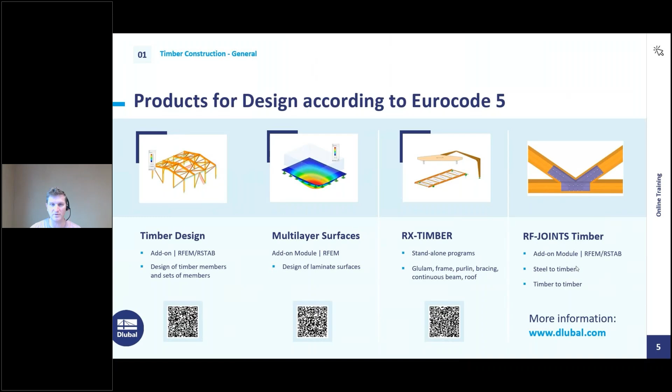We try to implement a new philosophy in RFEM 6, which is not available yet, but we are working on it. Okay, then we can switch over to RFEM 6 and start with our first example.

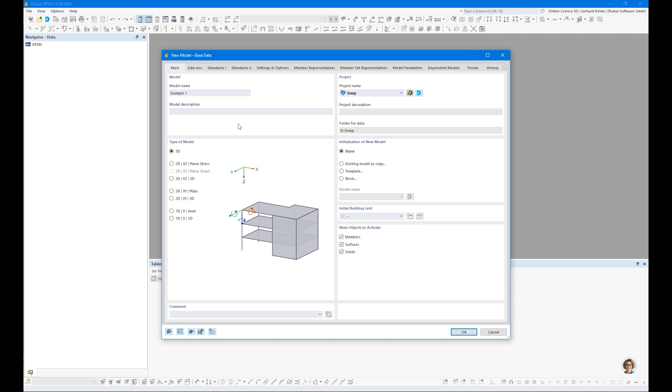Then we go to the add-on tab. Here we can activate the Timber Design add-on. Here on the bottom you will see the Multi-Layer Surfaces add-on, which was presented here.

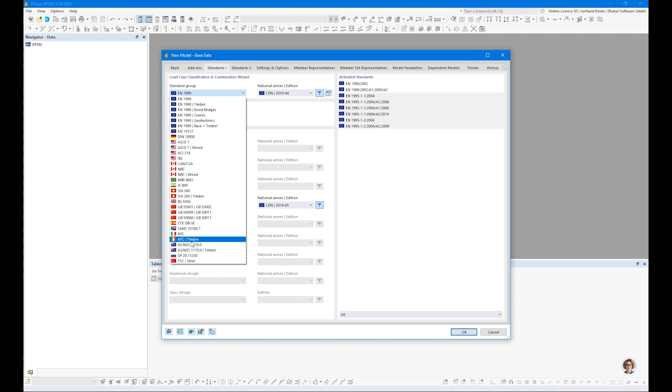We do not need any load wizard, so I deactivated this option here. For wind and snow loads, we don't want to generate it. Standard group should be changed to the timber-related standard group in this case, to consider the correct serviceability limit state load combinations. As you know, we talk about load duration classes, so that's why we need to always select the additional timber standard group, for European standards or US standard, Canadian standard, Italian standard, Australian standard, exactly. In this presentation, I will use the global Eurocode, that's why I do not select any national annex here.

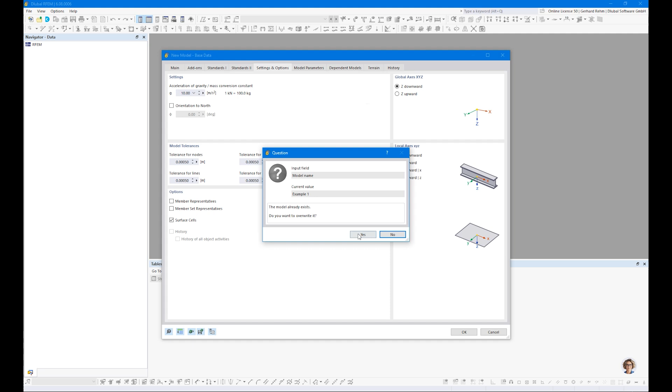So maybe we can deactivate the member representatives, because we model only a few members, that's why we do not need it. Okay, then let's start.

You know about all the navigators and the icons, I guess, from the RFEM 6 student training, that's why I will not mention any further things about that. We start creating a new member, I use this icon here on top.

And each member needs a cross-section. So I will create a new cross-section. So maybe before I start, I will delete all data to start exactly from scratch. So a new member, and we will load a new section from the library.

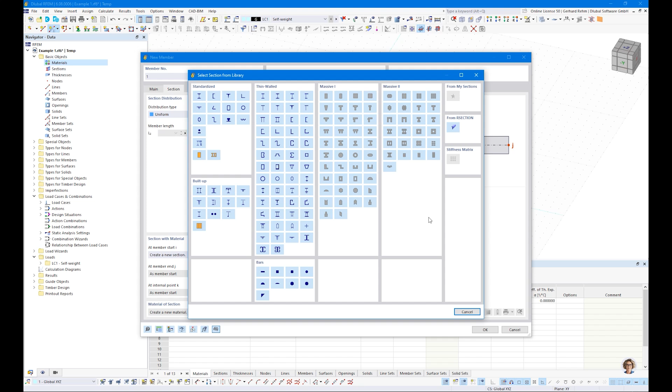So all these massive 1 sections can be designed according to Eurocode and also according to SIA and I guess the NTC. The composite sections, massive 2, is in progress, so it's not available yet in RFEM 6, since we introduce a new philosophy to design composite sections, because we do not want to use the gamma method, which is described in Eurocode 5, which is really limited in its usage, and we will use a different approach here, and we are working on it. So, but mostly we use our rectangular section.

We need a material. We open the material library, and we can use here these filters to find the correct material, or we can simply use the search. So in this case, I want to use the C24 according to European standard. That's why I enter C24 space EN, and I will get directly the material I'm looking for. Okay, then let's go to the geometry. In this case, the width is 120 millimeters and the height is 200 millimeters. If you're interested, you can also check here the section properties.

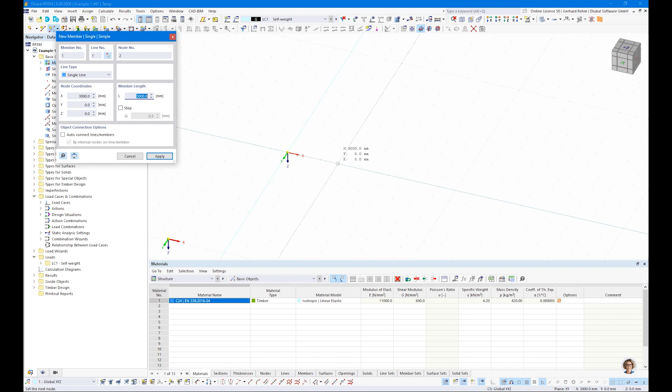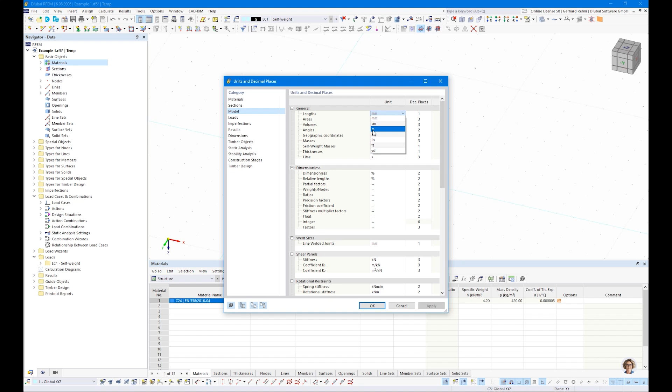Okay, so now the beam is on the cursor. We can start, for example, here in the origin and use these black grid points. I see the unit is still in millimeters. We can change this. So I go to 3 meters and the next one should be at 4,500 millimeters. So the second span, in this case, we simply enter 4,500 millimeters and click the enter button, and that's it. So maybe let's switch the units. I have changed it in a previous file. That's why it's set to millimeters. I want to use meters here. Okay.

Okay, so this is our rendered two-span beam. Of course, if you want to check the wireframe model, simply switch to wireframe. So this is actually what we use for our analysis. Okay. So we have this two-span beam here. We have the beams. Now we add some supports.

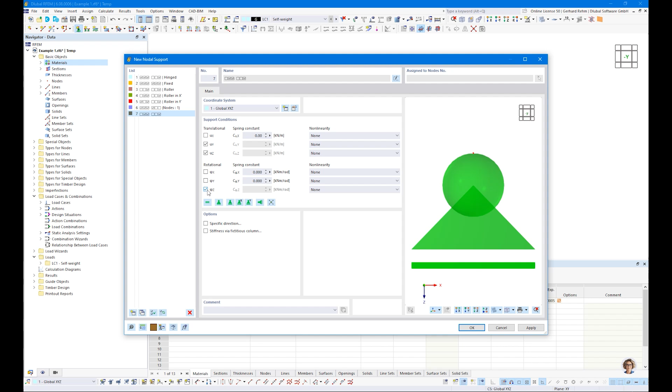So we will use a fixed hinge support here on the left side. Okay, and we will use a sliding support at the intermediate support. I create a new support which is sliding in X, and I will apply them on node number 2 and 3. Okay, so that's it actually.

We have already the load case 1, which is created as default. So let's check load case 1. This load case 1 considers automatically the self-weight of the beam with factor 1.0. So in case you want to calculate some examples from university, mostly they do not calculate the self-weight separately. They add it into the member load directly. So in this case, you can simply deactivate this checkbox. Okay, so here you see directly this load case 1 self-weight is assigned to the action category permanent. That's why we use a load duration permanent here.

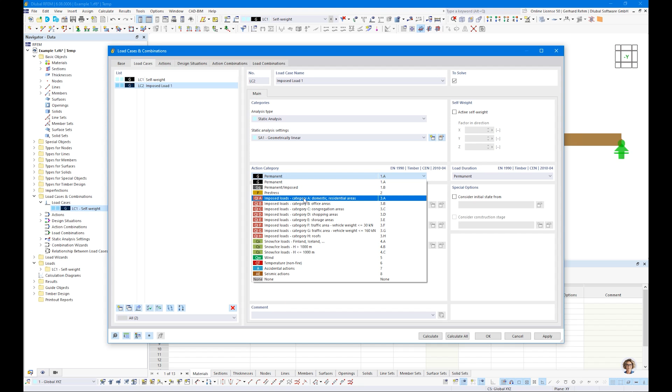Okay, we create another load case. In this case, it's imposed load 1 on span 1. Action category we will change to imposed loads category A in this case, and you will see that the load duration is changed accordingly. I will create a copy of this load case and change here from span 1 to span 2. That's only a description. You can use whatever you want. Okay.

Then let's fill our load cases with loads. So in this example, I will add a new member load. So watch out, do not use the line load for members. This will not work. You need to use the member load. Of course, you can also add some nodal loads too. But for our case, we use the member loads. Okay, and we will apply a member load, in this case of 2.5 kilonewton per meter. Click the member 1 and 2 and click OK, and then you will see that the load is created. Okay, then let's switch over to the imposed load.

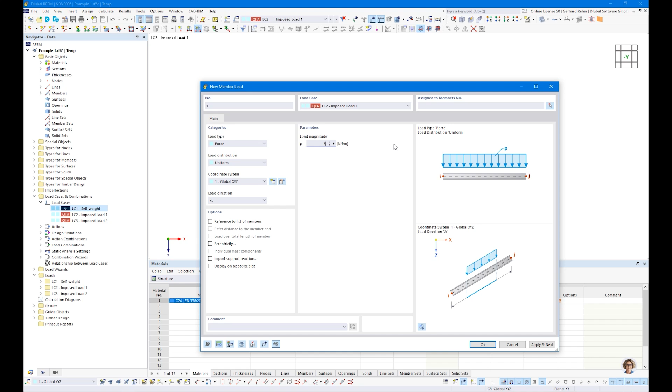In this case, we will use 3 kilonewton per meter on the left span, and also in load case 3 on the right span. So we need to check the imposed load separately. We cannot use one load case in this case, because of course the imposed load is a variable load which can act on left, on right, or both at the same time. So for example, the biggest deflection we will receive from load case 3 in this case, but the biggest bending moment we will get from load case 2 and 3.

So when we check our load combinations, we will see, or maybe we should go to the load cases and combinations dialog and go through this dialog first. Okay, so we have created our load cases. Then we will see what happens to our actions, especially important here for the imposed loads. When we check it, okay, both load cases can act simultaneously.

In case we switch over to alternatively, then both load cases will not be combined. But of course, we want to consider all of them at the same time, means simultaneously. Okay, then let's switch over to design situations. Here we can define which design situations we want to check. Of course, we want to check ULS, means permanent and transient. We want to check the characteristic deformation and the quasi-permanent deformation. So it depends on the national annex.

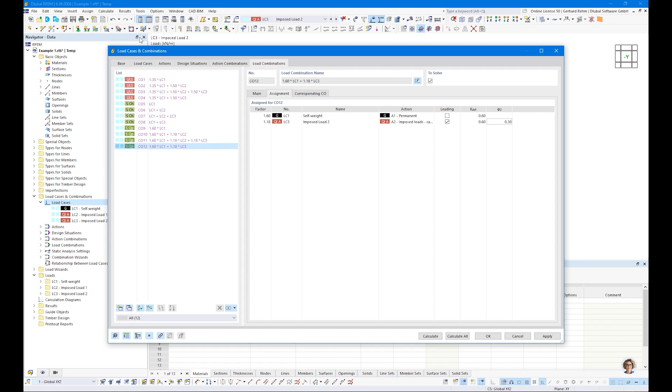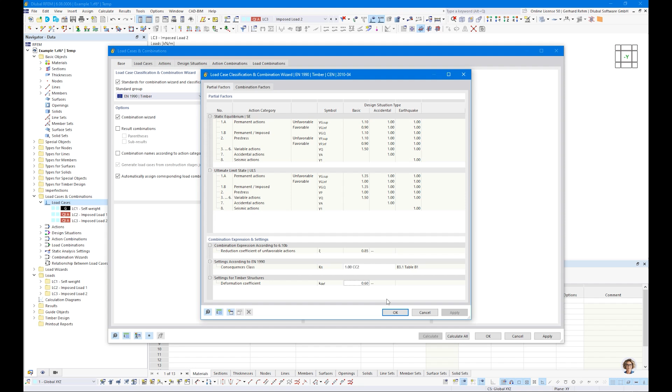So the kdef value is described here in this edit dialog for the load case classification, and here on the bottom you see which kdef value is used as default, 0.6. This is, I guess, for most national annexes the case for softwood. Of course, if you have different service classes or different kdef values, you can change the values here for this simplified method to consider creep. Okay, so that's it so far.

What we can do now, we can calculate the load cases and load combinations. So I do that for design situation 1. The design situations include all load combinations as an envelope. So what that means, we can check it here. In the beginning we see the deformation with the maximum and the minimum. That means the minimum deformation will come from that load only.

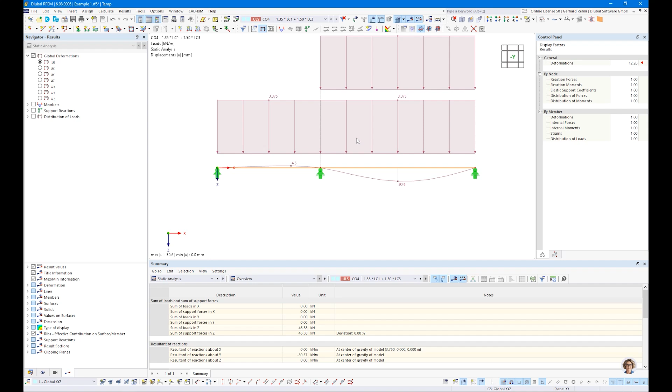Not from CO1, sorry, from, I guess, CO2 in this case, it's the 9.5 millimeter. And the maximum one should come from load combination 4, I guess. Yes, so load on the right span. Same for the bending moment, internal forces My. The maximum bending moment, 15.55 kilonewton meter, will definitely come from load combination 3. And that's the case.

I don't want to go in detail because this was shown at the RFEM 6 training. You receive your deformation, the internal forces, and the support reactions. So what we do is we focus on timber design today. That's why I switch over to the timber design add-on. Here I can define what I want to check. I will check ULS and both SLS checks. And of course, I want to design both beams.

So that's the question now. Do we want to design the beams separately, or do we want to design it as one element? To do so, we can create a member set. So when we go to members, create member set, you see we can combine the different members to a member set. That means we do not design 2 members, but we can design 1 member set.

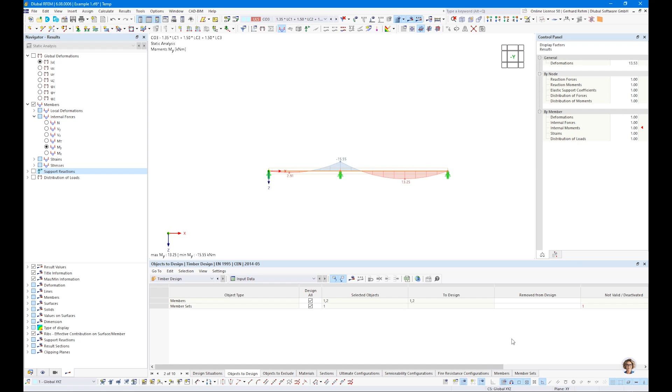Okay, I click OK. And when we check the member by right-click edit, or simply double-click the member, you will see that the design properties are now on the member. There are some additional tabs here because of the design settings. But when we don't want to design any member, simply create a member set and take over the design properties to this member set. So when we click OK now and go back to the members, you see this member has lost its design property because it is assigned to the member set. Okay, so let's go back to the member set.

And here we can define some additional settings. For example, we can define which service class should be used. We can define some local section reductions. We can define effective lengths in this example for buckling, but since floor beams are mostly never forced to fail for stability, we do not check stability for this example. We will check stability in example 2 and 3.

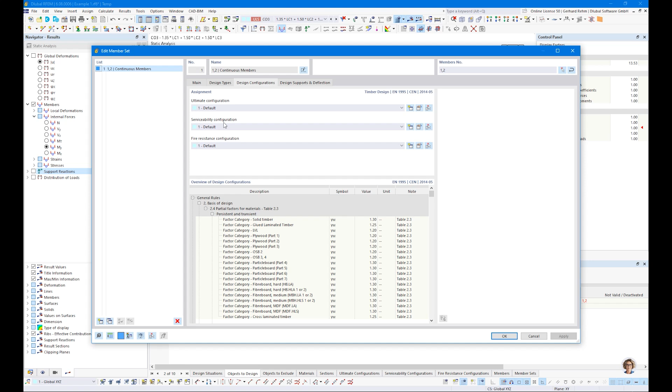Okay, so let's go to the design configurations. Each element, member or member set has assigned an ULS, an SLS, and a fire config. We focus on ULS and SLS design checks for today. Let's check the default setting for the ULS config.

When we check it, there is, for example, this option, perform stability design, yes or no. In this example, I do not want to get informed that I miss some input for stability. That's why I deactivate this setting, since I do not want to check it. There are some further settings for members and for surfaces, and also some standard parameters, which I don't want to mention today in detail.

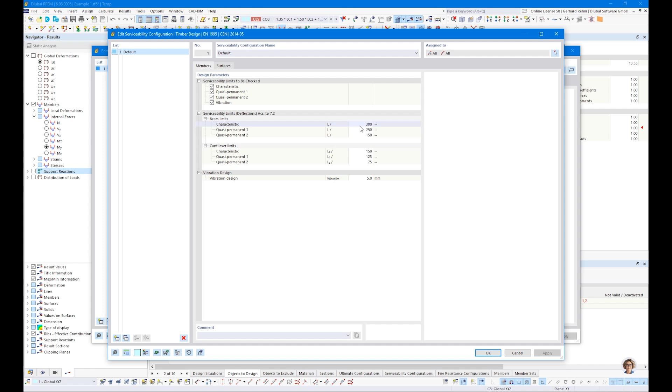Okay, when we check the SLS config, we will see our limits from the standard. It's also dependent on the national annex, of course, but it depends on you actually, so you can define your limits manually. Okay, then let's go to the last tab. The last tab is about design supports and deflection.

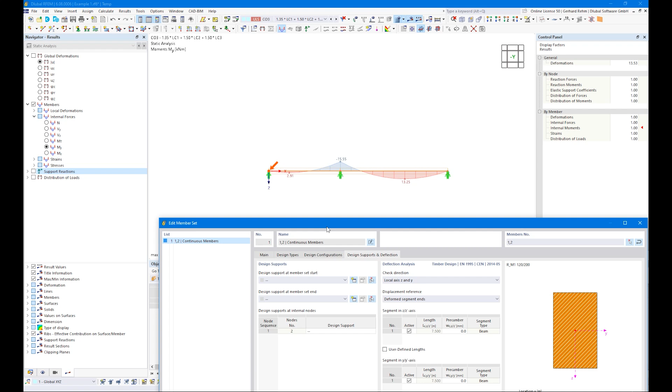Since we do not design the members individually, so member 1 and 2, but the member set, we will see that the reference length for the SLS design is used for 7.50 meters. So that means if we would leave the setting as it is now, the program would check L over 300, for example, by 7.50 meters over 300. This is of course not correct. So what we need is the first segment and the second segment.

And how to consider this is by using design supports. This is design support, so I will create one at member set start. This design support is for the design of pressure perpendicular to the grain. That's option 1, and option 2 is to create the segments for the serviceability design checks. Okay, so in this case, we want to consider the support in local Z-axis.

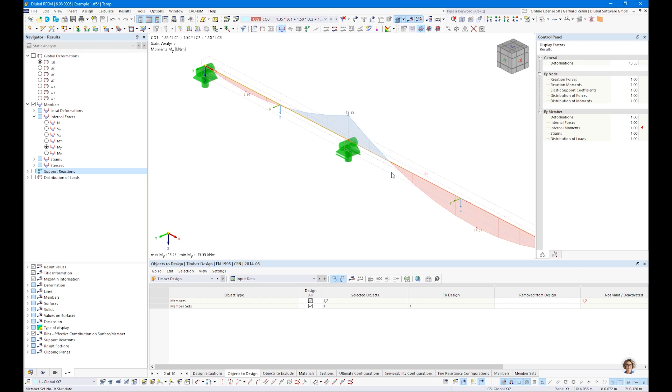So let's go back and check the local axis system of the member. By right-click the member, local axis system of member. Each member has its own axis system. And in this case, we are focused on the Z-axis. So let's go back to this dialog, create a new design support.

Support length should be 60 millimeters here. The width should be overtaken from the member. Support width in plus Z direction. Of course, we can switch to minus Z direction too, but in this case, the Z axis goes downwards. We want to apply the support at the bottom side. It's not an inner support. It's a support at the edge. We could apply some shear force reduction, and we could also apply some reinforcement elements like fully threaded screws.

So for the compression design perpendicular to the grain, we need to introduce this kc,90 factor. For softwood and discrete support, we use this factor 1.5. So this is a user input. We want to consider it for fire design. We don't do any fire design today, but we can leave it on. And yes, we want to consider it for the deflection check. So I assign this design support to the member start. You will see this symbol here on the bottom, and also at member end.

You will see the tables are still based on one segment, but now it automatically detects this intermediate node. And what we will do is create a new design support here. Length should be 140 millimeters. And in this case, it's an inner support. This information is important because it needs to know if the additional 30 millimeters are available for the support pressure design check on both sides or only on one side.

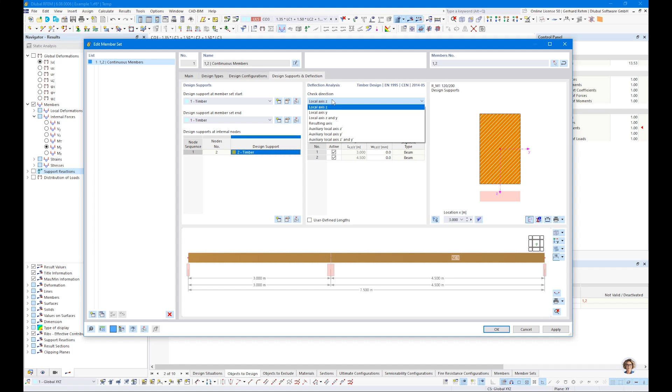Okay, and now you see the table has been changed. Now it detects two spans. One span is 3 meters, the other span 4.50 meters. We can switch to local z-axis only because we have no deformation in y direction, but we can also leave it for z and y. It does not matter. Okay, so that's it for this tab.

Then let's go back to the design here on the bottom. For timber design, input data. As you see, member 1 and 2 get invalid because we do not have any design properties on them anymore. That's why we deactivate them, and we want to check only member set 1. Okay, so that's it for the input, and we can simply start the analysis.

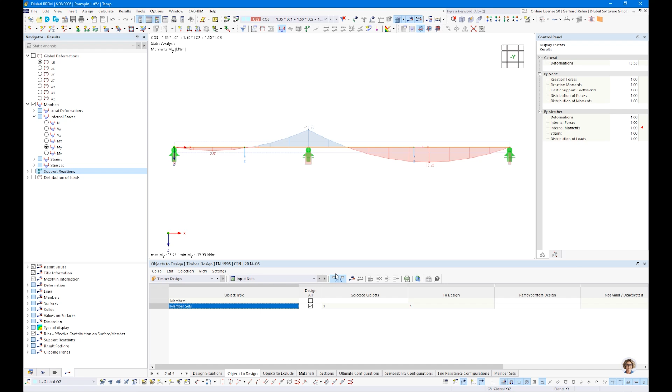Okay, so what we see here is the overview. The overview shows us what is not fulfilled. So we see section proof is not fulfilled, and also serviceability is not fulfilled. You see it here in the graphic with this red color. Areas with green colors are fulfilled, and areas highlighted with the red color are not fulfilled.

So we can switch over to design ratios on members. And here we can see in detail what design checks are not fulfilled. So we have a few 0 values here. We can use this filter to show us everything which is higher than 0. Okay, the design of the support, meaning the compression perpendicular to the grain, is fulfilled. The shear is fulfilled, so we have no shear issue here, but bending is not fulfilled.

We can check this here in this table, or we can also check it graphically. Okay, we have different options. The first option is the default option, ratio envelope. It shows us the ratio envelope of all design values. But we can also switch to selected design checks. In this case, maybe I want to deactivate serviceability. I want to see only the graphical representation of the ratio for ULS or only for SLS.

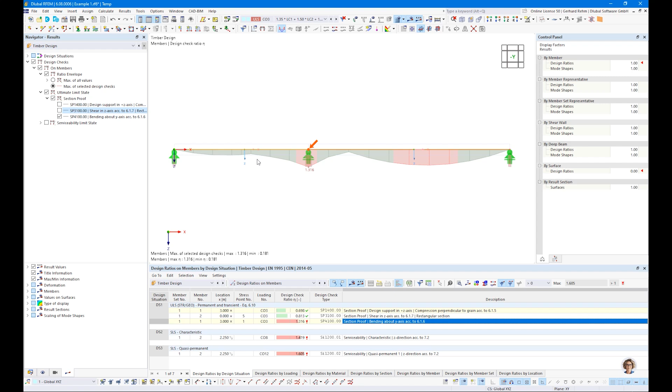So here we can prove the plausibility. Yes, the ratio is affine to the deformation. That's fine so far. Additionally, you can check the results for individual design checks, for example pure bending or pure shear or pure design support. This helps you to better evaluate the results. But let's go back to the table results and to the details.

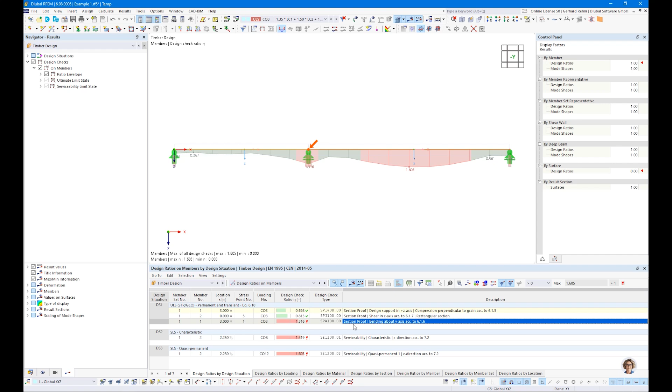So in case you are interested in how the design check is done, you can simply double click this design check and you will see what is done here. It's nothing special since we do not check any stability. We will check the stability later, and then we will see that all equations are listed here. So we do not have a kind of black box like other software. You see each intermediate value, and you will be able to follow your hand calculations with that.

Okay, so in this case, nothing special. We have our k_mod dependent on the load. In this case, it's CO3. CO3, of course, includes imposed load and load case 1 dead load. That means the k_mod value for medium term is 0.8 multiplied by our 24 Newton per square millimeter divided by the partial safety factor, and you will get the allowable stress, and the stress divided by the allowable stress gives you the ratio.

Okay, that's actually all. But of course, what we can do now is optimize this situation. There are two options. You can simply change your cross section or your material manually here, or you can optimize it in the section tab dialog, where you have the option to optimize it from the current row. We have 120 by 200; we can optimize according to parameter b and h, but let's start with the h. We go in 20 millimeter steps, and then the program tries to fulfill the design checks for ULS design only.

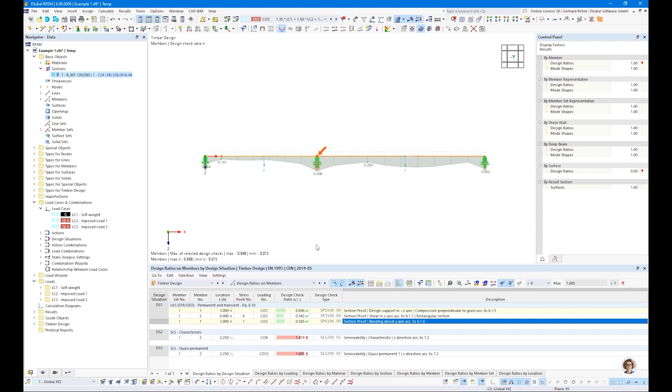120 by 300. No, sorry, it's all good. Let's check the design ratio. Yeah, it's good. So when we check the design check again, it was optimized to 120 by 300 in this case. So I'm wondering why we cannot use 120 by 280. It should also work. So I'm confused why it is not working. Let's do it manually and double check again.

Strange. It works with 280 as well. Let's try it again. Maybe I have overlooked something. So we will optimize the height. We will start with 200 millimeters and go to 300 millimeters in steps of 20 millimeters. So we have all the sections available for optimization. And now let's recalculate. Sorry, that was my problem. We need to calculate the timber design add-on again. Small mistake.

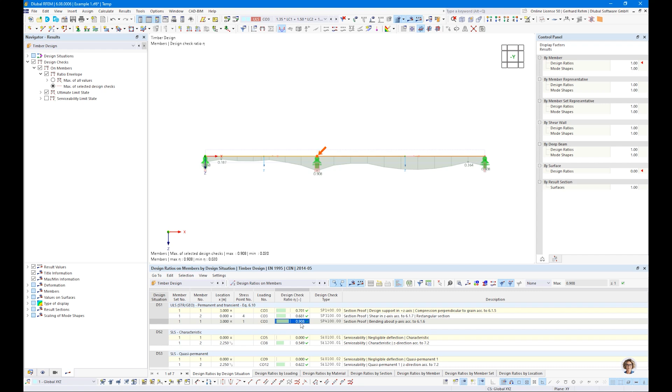Okay, now we see the maximum ratio is 0.9, and when we check the input data again, we will see 120 by 240 is used. So that's fine. It works as expected. Sorry, I forgot to calculate the results again. When we add the serviceability design check, we have... sorry, this one was 200 millimeters default. All right, calculate timber design again.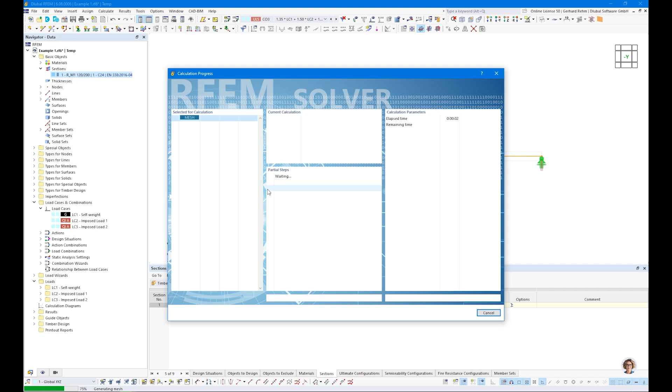Okay, so now we get the same result as before. We will see, okay, bending design check is not fulfilled. We can go back to input data and say, okay, optimize from current row, optimize the height. We start by 200 and the maximum should be 300 in 20 millimeter steps. So that's it. Click OK, and then we can calculate the result again.

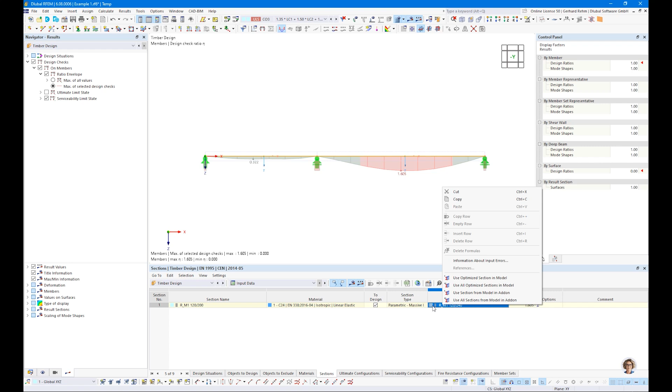Now we see that the design ratio is now fulfilled for ULS, but not for SLS. So what we need to do is we need to override this section. So simple right click, use all optimized sections in model. Then we will see the section will be overwritten, and when we check it again, then we will see the real deformation with the real cross section. So this process has to be done manually.

Okay, so let's check max of all design checks. Perfect. Now we have optimized it to 95% ratio, which is fine. Okay, so this is our first example. Let's switch back to our PowerPoint slides, and we will continue with our second example, the flexural buckling.

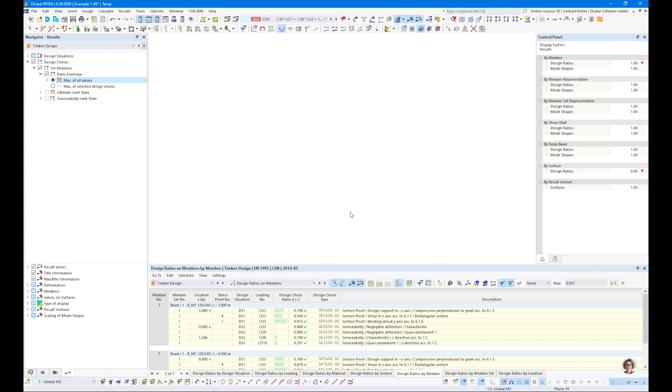Okay, I will create a new file here. So in this case, model name is example2, and add-ons, we will activate again the timber design add-on. We leave the standard, and we can activate the member representatives. Okay, I will not go in detail like in the first example, so I will skip a few things and I will not describe in detail every setting I will do.

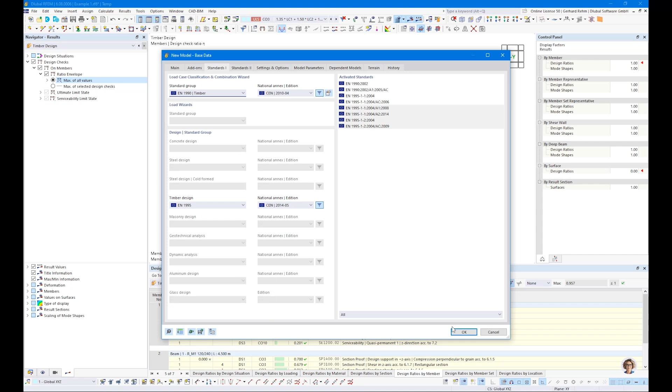Okay, so let's switch again, standard group timber. And now we talk about buckling design. So that means when we use a column, of course, this column normally gets high normal force. And it can happen that not the stress on the member is design controlling, but this column can buckle out of the plane. Depends on the weak or strong axis, of course.

So for this example, we will use a column with a length of 8 meters. So section 120 by 240, this is fine so far. So the length is 4 meters and 4 meters. We will have the weak axis, which is about Z-axis, and the strong axis, which is about Y-axis. And about Y-axis, the strong axis, we will have no restraint considered, and about Z-axis, we will have considered a restraint here in Y direction.

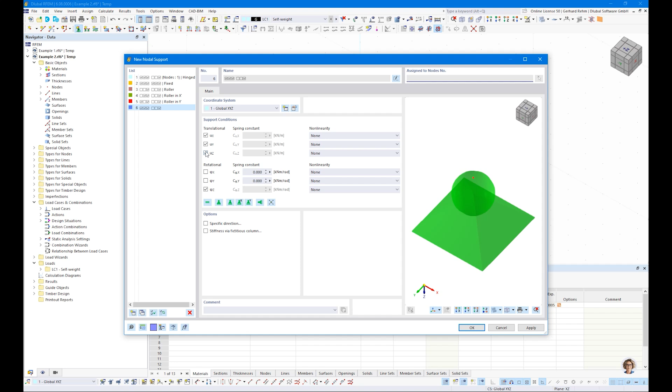Okay, so we need some supports on the bottom. Oops, sorry. On the bottom. And a support on top, on column head. So we should consider the support like this so that the normal force can go into the beam. Okay, here we go. So we will define some nodal load. I use the nodal load here, 35 kilonewton dead load.

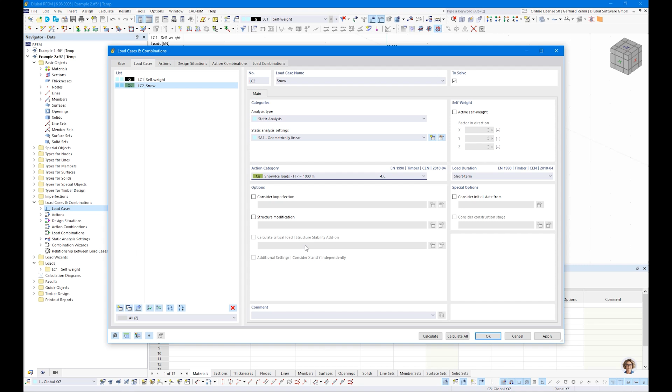Okay, and let's create a new load case for snow load, and we will switch over to this category, smaller than 1000 meters, for example. It detects short term as load duration, and when we check our load combinations, let's go back to design situations. We do not want to check serviceability in this case, since we have only gravity loads. We consider only ULS. That means dead load and dead load plus snow; in this case, first order analysis is okay, since we do only an equivalent member design.

So the Eurocode 5, for example, describes two methods: the equivalent member design and an approach with second order analysis and imperfections, but we will not do this approach today. We focus on the equivalent member design.

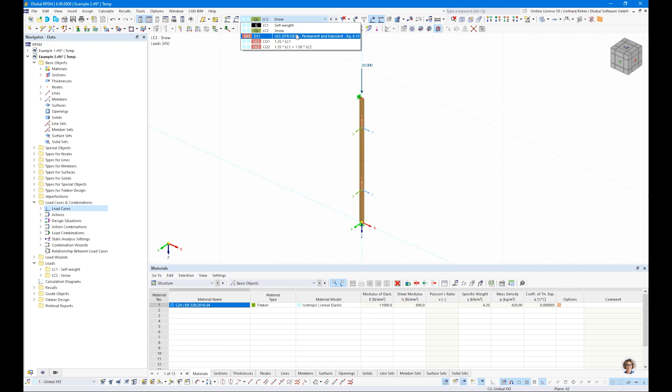Okay, that's actually it. We will fill load case 2 snow load, and we will apply 20 kilonewton of snow load here on top. I guess I don't have to say anything about the results. It's clear. When we check our design situation, we will get the envelope of load case 1, load combination 1 and load combination 2.

So we are interested, of course, in the normal force. You see the top and bottom value differs a bit because of the self-weight of the beam.

So when we go to timber design now and click the calculate button, you will get informed that no effective lengths are assigned and the stability design could not be performed. This is just a warning message. If you are fine with that, because you know this beam will not fail for buckling, then you can ignore it. But in our case, it's clear this slender beam will definitely buckle out of plane, so we need to consider this fact.

So when we check the results, we get only one design check, which is a pure section proof, meaning force divided by the area divided by our strength. That's all, nothing special.

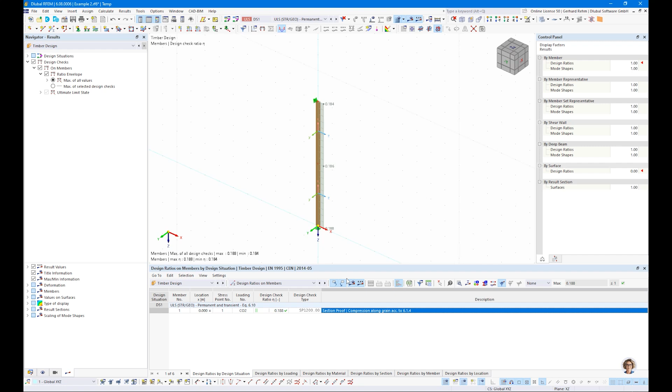So what we want to do is stability design check according to equivalent member method. In this case, again, we will create a member set, two members, create member set. We want to overtake the design properties again, and here we define design types. In this case, we need effective lengths.

Here in this tab, we say we want to check flexural buckling about Y and Z axis. Lateral torsional buckling is not an issue - this will be in example number 3. You can leave it on or deactivate the checkbox; it doesn't matter since we have no bending moment on these beams.

Okay, and here it's about the effective length factor. In this case, it considers both buckling coefficients about both axes with factor 1.0. But as I said, I want to consider a lateral restraint in Y direction on node number 2. To do so, when we check the absolute values, it's 8 meters. For buckling about Y axis, we want to consider 8 meters as buckling length for this Euler case 2. But for buckling about Z axis, we want to consider only 4 meters.

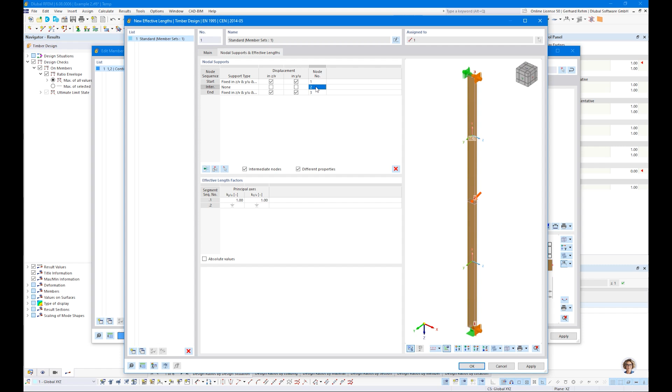To consider this fact, we need to also consider this intermediate node. So activate this checkbox and pick here this member set, or simply insert this row. Node 2 is detected automatically, and yes, I have a restraint in Y direction. You see now this brown colored supports - this represents our restraints.

As you can see here, for buckling about Y we still have one segment, and for buckling about Z axis we have 2 segments. Here you can see buckling length for Y axis is 8 meters and for Z axis is 2 times 4 meters. This is a simplification, it's on the safe side. In reality, the buckling length is a bit smaller since the turning points are next to the support somehow. But for practical usage, this is fine and common in practice.

Okay, so that's it. We can click OK and OK again. And we can also activate this design support in RFEM directly, so we can check them here also.

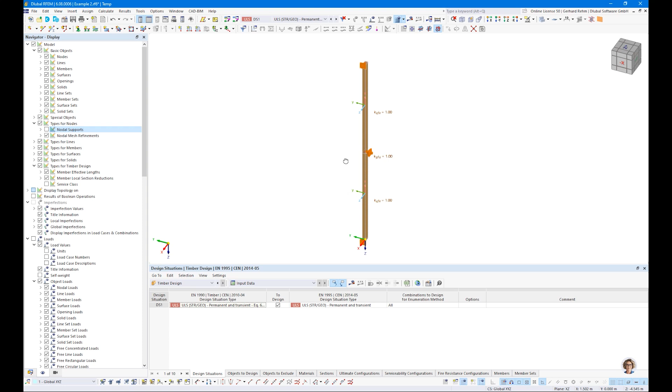Maybe it's worth deactivating the real supports, the nodal supports, so you can see directly which effective length factor is used, or which length is used for Z, V axis, Y, or U axis. It helps you to see how you have to find your bracing or your lateral restraints.

Okay, so that's actually it. We can start the analysis again. We will get this warning message again because I did not deactivate the members - I can ignore it, but I want to do it proper, that's why I deactivate it. And then we'll see we get this cross-section design check, and additionally we get this buckling design check.

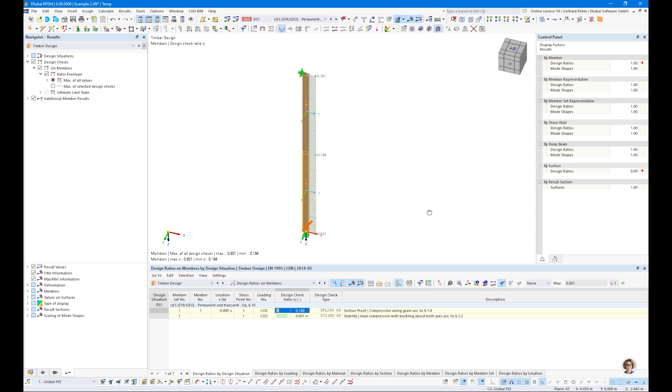So let's double check this buckling design check, because now we see all these equations from the standard. First we start with the slenderness. Based on the slenderness, we get the ratio for the slenderness, the relative slenderness. And with the slenderness, according to the Eurocode, considering imperfections, we calculate this reduction factor Kc.

So it's actually nothing else than reducing the cross-section, section-proof design check by this Kc factor, in this case 0.23. That means when I multiply this ratio 0.801 by 0.23, I get exactly this ratio of 18% or 19%.

Okay, so you're able to follow each intermediate value, so you can compare it with the hand calculation. That should help a lot by proving the results. Okay, that's actually it for the buckling design check, and we can switch over to the next small example.

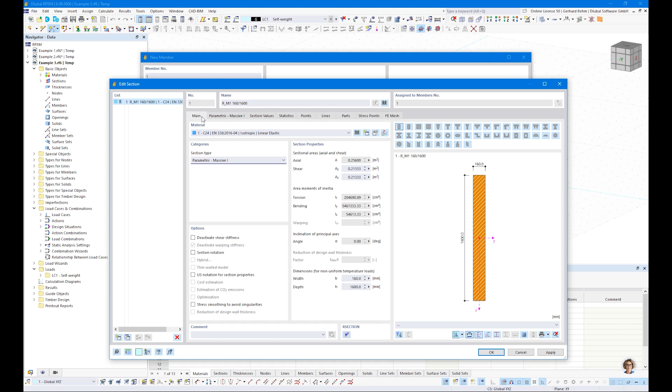We start with a new cross section, in this case 160 millimeters by 1600 millimeters. Of course, we cannot make this high beam with C24. We need to change the material to GL24h, for example, to a Dlubal material. Okay, that's it.

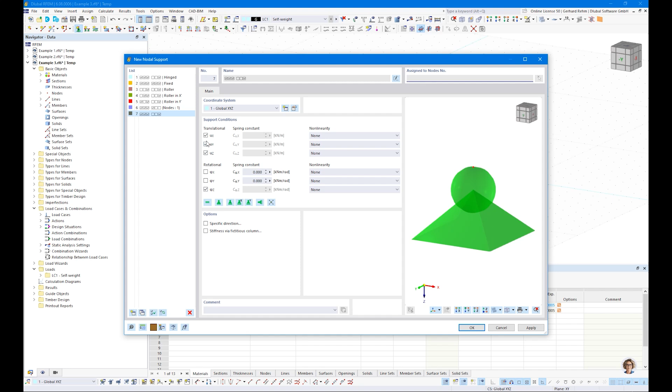The beam length should be 18 meters, like this. We will have a fixed support on the left side, and then a sliding support on the right side. Of course, we could also use the fixed one here because we do not have any axial loads, so it does not matter. We have no normal force here.

With the slider here, we can increase the size of the supports. We will check everything with that load, so we will not add any further load cases, since when you do timber design, the ratio is always dependent on the load duration class. In case of high self weight and, for example, low snow, then snow is not controlling but pure self weight. So we will not add further loads.

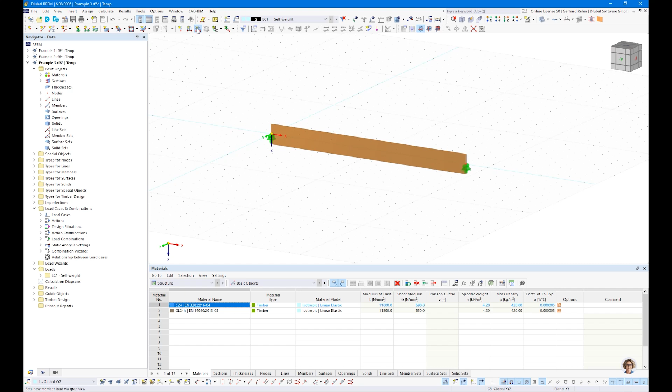So I will add a load here. For example, I have no idea, let's start with 8 kilonewton per meter on this girder, and let's see what's happening.

Of course, the same when we run the analysis now, we will realize we get this warning message: you have not defined any effective lengths, no stability is checked. And of course we want to check stability, because we check ULS and SLS. You will see the ULS design check section proof is 63%. So actually it's good, but of course we need to know what is happening with this upper chord in this example. That's why we need to define an effective length here.

We do not check flexural buckling, that's why I deactivated it. Since we have no normal force, you can also leave it activated. Here I want to check lateral torsional buckling. We have three options to check it, because for lateral torsional buckling we need to know what is the critical moment or the critical stress, because based on this critical stress we can check the equivalent member method.

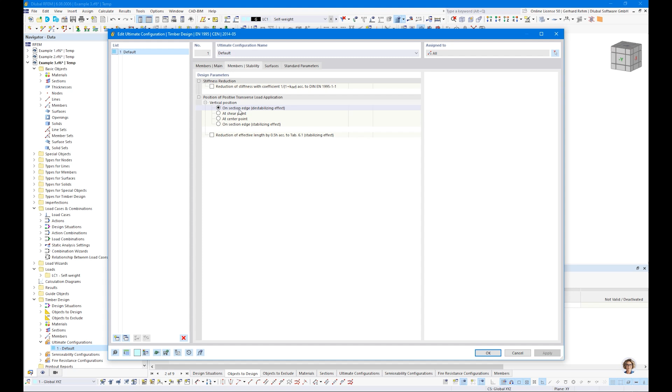Let's go maybe to the ULS settings and to member stability. Here we can double check where we have applied the load. In this case the load is applied on the top flange, on the top side, because of course it has an effect when the load is acting on the top side — it is more critical than when the load is applied on the shear center or maybe on the bottom side. In the equivalent member design method, we simply modify the buckling length with 2 times h, which is described in this table in chapter 6.3.3 in the Eurocode.

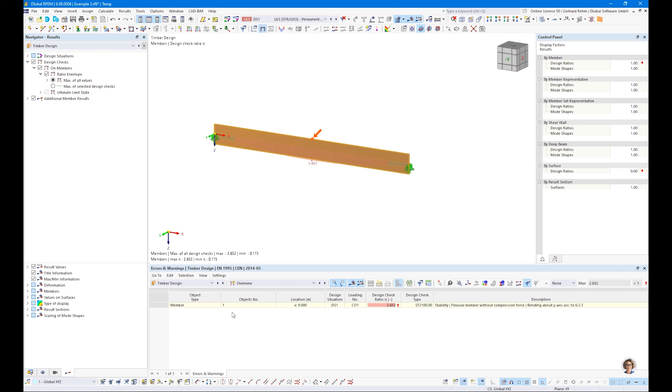All right, we can start the calculation. And of course, you will see — maybe I will deactivate SLS, I'm not interested in SLS, that's why I delete this check — and focus on ULS only. And you see, okay, the design check is not fulfilled anymore. Let's double check the design check.

So we see, okay, this is our allowable strength, and we see this equation which comes from the Eurocode to determine the critical stress. We have some factors here: some stiffness, the 5% quantile values for E modulus and shear modulus, the torsional constant, and the buckling length. So we have an 18 meter beam length multiplied by 0.9, which was 16.2, plus, since the load is applied on the top side, plus 2 times 1.6 meters, equals 19.4 meters. We calculate again the slenderness, and due to the approach of the Eurocode we will get this reduction factor. So we modify, or we multiply, our stress design check — in this case the 63 — we multiply in this case by 0.24.

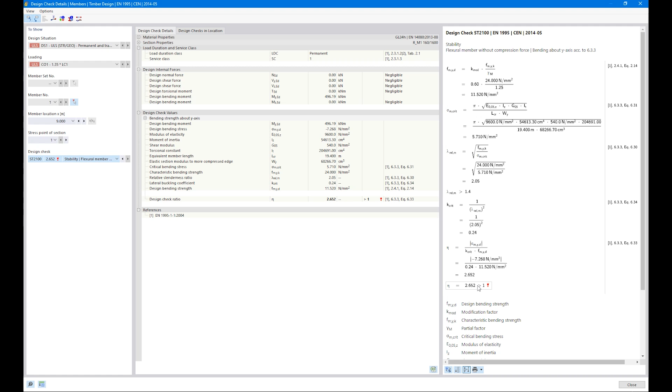In this case, we need to divide it. 0.63 divided by 0.24 equals 2.62, 2.65. Yeah, and this is exactly what we get. So that means without any restraint, we will not get a fulfilled design check. And in this example, of course, you mostly never have an 18-meter long beam with no restraint. Normally there's some bracing at the other sides and some beams added which support it. Yeah, and this effect we want to consider.

Maybe we will do the same first with the eigenvalue solver. I can maybe directly create a copy including the load. And for this beam, I will switch over to the eigenvalue solver. I create a new effective length where I check LTB by using the eigenvalue solver.

Okay, so now we have two beams. One beam is checked with the analytical approach. The second one is considered by the eigenvalue approach. Okay, let's check the results. They should be quite similar, should not differ so much.

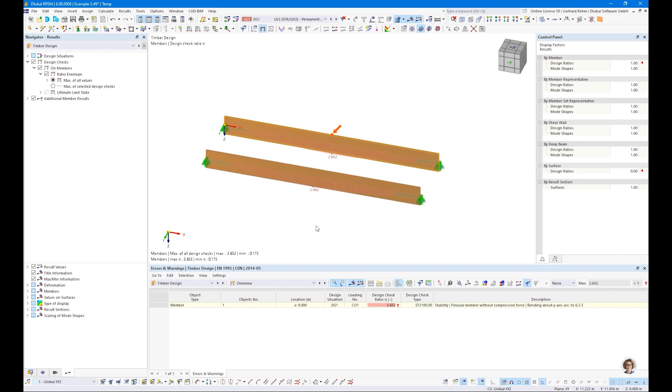So in this case, we have 2.46 compared to 2.65. The result is the effective length here, which was considered on the safe side. So normally the buckling length is a bit smaller, but Eurocode 5 uses simplifications. It's not exactly factor 0.9, but in reality it should be factor 0.885, for example. And also adding 2 times the beam height is not perfectly correct. That's why we have a different approach.

If you would use the German approach from the German annex, you would get a smaller buckling length, and then this one should be nearly, or should be the same.

Okay, we should solve the problem. And what I do is we will add some restraints here for the buckling method. So let's do it. For both cases, we divide the members and add some intermediate nodes.

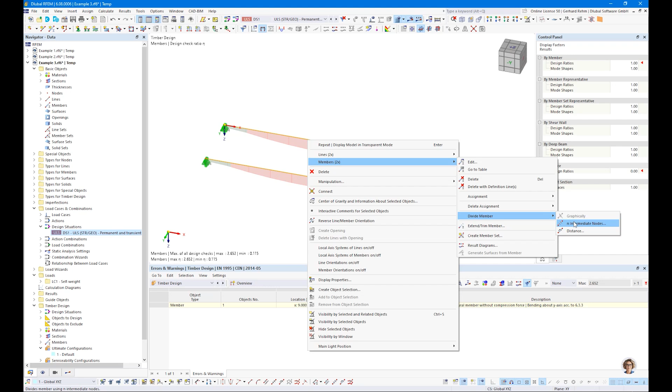I will add 2 intermediate nodes, but I will not divide the member. I create nodes on member. That's also possible, I do not have to always divide the members. So I have this node on members. When we double check it, it's not a standard node, but a node on member.

And what I will do is I will modify the buckling length. So in this case, we want to consider intermediate nodes, restrained in Y direction, and all elements can be considered now with factor 1, since we have a nearly constant moment distribution in between the center of the beam. So that's why I use 1.0 here.

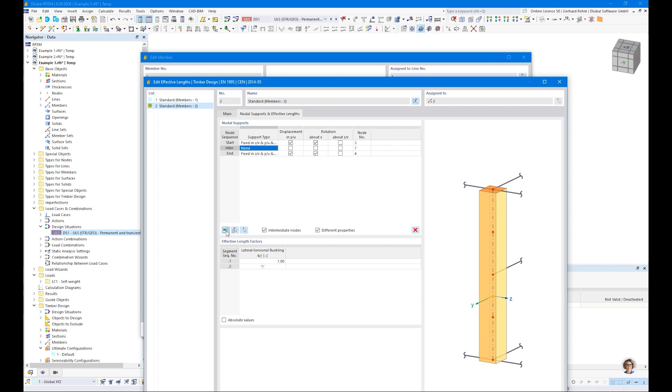This is also common in practice. And of course it's a simplification. Yeah, it's not exact. A better result you will get with this eigenvalue solver. And here I do the same. I insert again these lateral restraints, and in this example the lateral restraints should be applied on the top side.

So maybe switch over to the real view. So we have this brown colored supports which act at the shear center at the moment, but we will change this to the upper flange, and this setting will be sent to our eigenvalue solver.

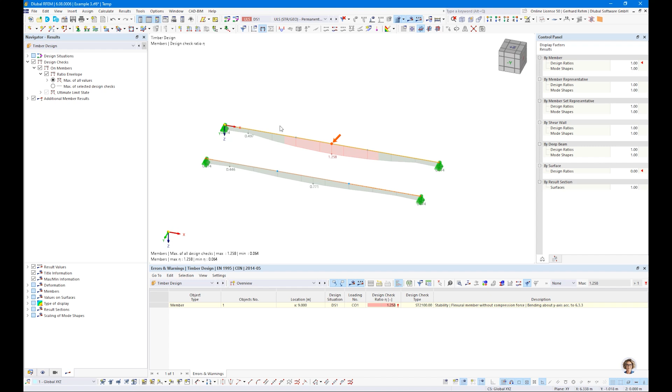Yeah, okay, now let's compare the result again. Okay, and you will see that the eigenvalue solver shows us a result which is fine, but not the equivalent member design method by using this analytical equation. Yeah, this approach is too much on the safe side.

We should use lower, smaller buckling lengths in this case. So let's double check it. So we have 9 meters 20 in this case. It's nothing else than dividing 18 by factor 18 divided by, we have 3 spans in this case, 6 plus 2 times 1.6 meters, equals 9.2 meters.

So maybe this approach is not correct. The buckling length in reality is smaller. But we do not focus on this method. We focus on this eigenvalue solver method because it gives us better results.

Yeah, so let's check it. When we double click the design check, we do not see this equation to determine the critical stress analytically. We do it with this eigenvalue solver. And from the eigenvalue solver, we receive this alpha critical factor. Multiplying this critical factor by the bending moment from this load combination, we will get our critical bending moment, and we can calculate our critical stress accordingly. Okay.

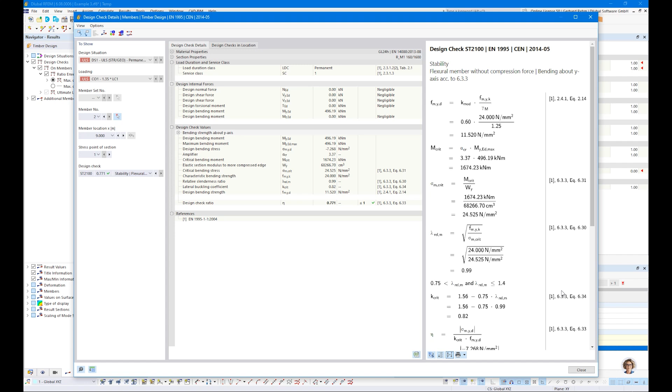Yeah, that's it so far. Maybe additional info. You can see here these additional results, mode shapes. So when you see it, this is the mode shape which is considered. Maybe we can switch over to the colored distribution, and here you can perfectly see how this upper flange is failing out of the plane.

You'll see these areas here are restrained. We will have no deformations here at this location on the top chord, and this is, in my opinion, the best way to consider these buckling effects. Of course, if it's a one-span beam with simple restraints and so on, the analytical equation gives good results as well and can be used. But in more complex systems, I recommend to use this eigenvalue solver to detect this critical bending moment or stress.

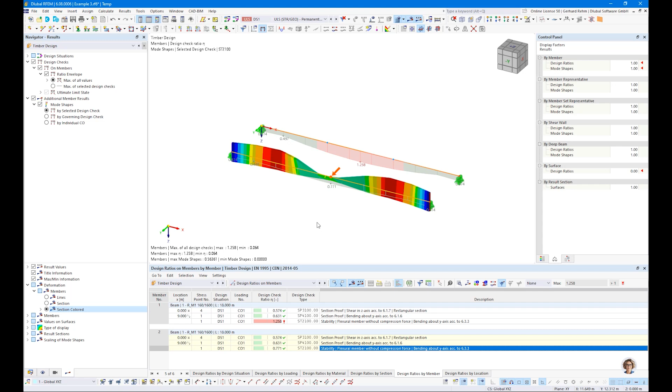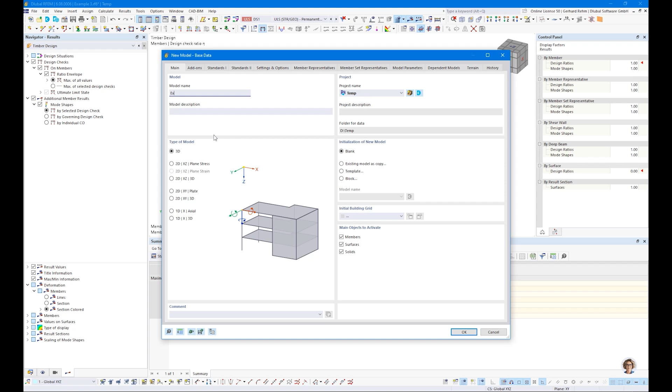Okay, then, that's it so far. And we will switch over to our last example. So we are leaving the beam design. We switch over to surface design. Okay, again, we need a new file. Example 4. And here for add-ons, we activate this multi-layer add-on. We activate timber design. We switch over to the timber standard, and that's it. We can create this file.

And now you should know that CLT design in RFEM is not based on member design, but on surface design. It brings you many advantages, such as individual shapes. You can consider openings in the CLT panel and so on. Okay, but today we will do a simple CLT slab 1 meter by 8 meters. We create a new rectangular surface, and same like for members, we need a geometry. In this case, we need a thickness. We create a new thickness, and we will switch to layers.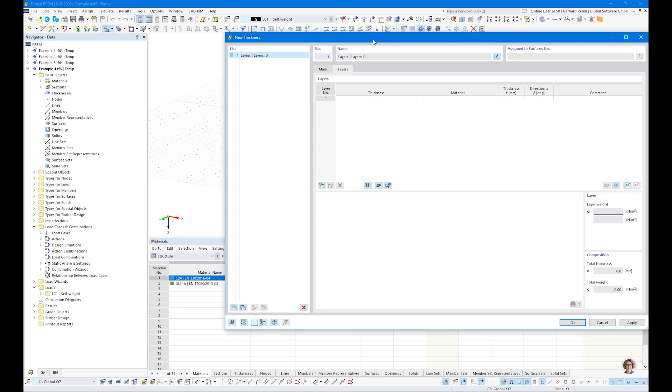So here we can define our composition manually from the material library, or we can simply load compositions from the producers. So we have different producers from different countries implemented. So in this case, I will use Binderholz producer, 140 millimeter 5-layered CLT panel. Okay, so when we overtake the settings, you will see the type comes from library. This is the material which is used, this is the thickness which is used, and this is the orthotropic direction which is used. Means the first layer is orientated in 0-degree direction, the second layer in 90-degree direction, and so on.

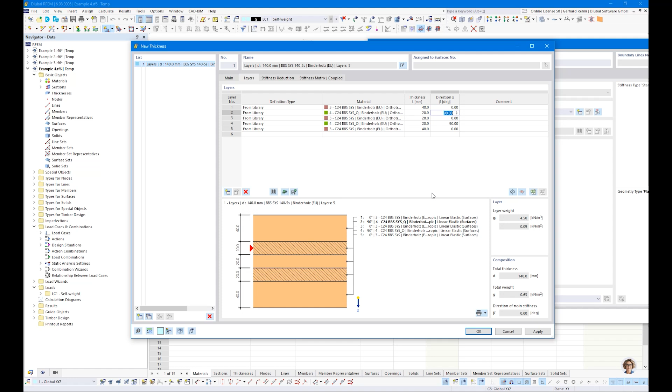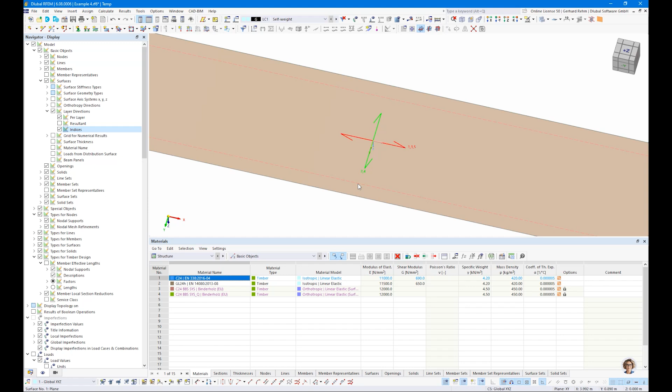Let's create a surface and check out the orientation. So 1 by 8 meters, I'm using the grid points. And when we check the local axis system, you will see, as I explained, the 0-degree direction is orientated parallel to the local x-axis of the surface. We can also show the layers here at surfaces, layer directions. For example, with indices, you will see layer 1, 3, 5 is orientated in this direction, layer 2 and 4 in this direction. Or, for example, as resultant. And this gives you the span direction of the CLT.

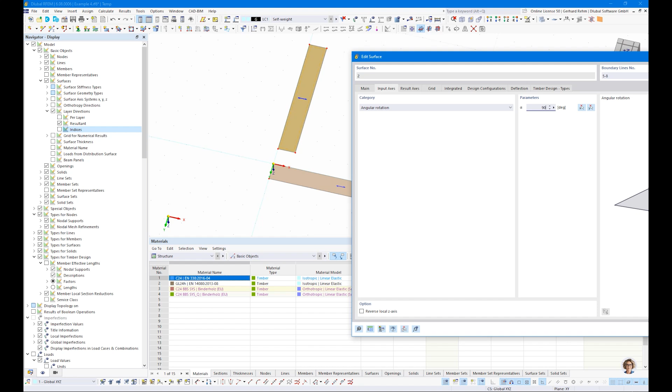But of course, if you would model the surface like this, in this case I don't want to consider the orientation like that. What you can do is you can create a new composition where you rotate 0 and 90-degree direction. So you are able to go inside here, create a copy, and then change this to 90, 0, 90, 0, and so on. But I don't want to do it. It's much smarter to rotate the specific axis of the surface by, for example, 90 degrees. Okay. All right. This is how you can control the orientation of your CLT.

Okay, I will add the supports to the structure. In this case, we use simple pin supports. So maybe we can reduce this to see it's not a nodal support, it's a line support. It supports the whole line here. Okay, and now we need to define loading. We need, again, load cases for the imposed load for this floor. Imposed load category A, create a copy, and for span 2. Okay, we will feed the load cases now by loads. So we will consider 2.5 kilonewton per square meter for the self-weight.

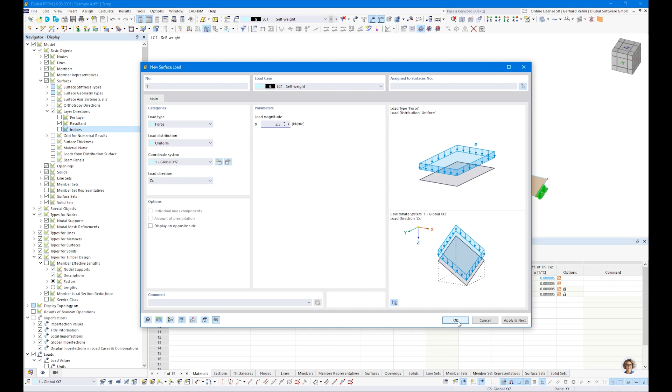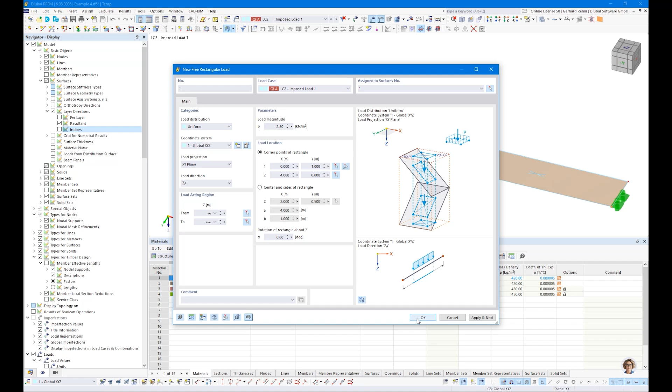And for the imposed load, we did not divide the surface here. We have one surface. So in this case, we cannot use the surface load, but we can use here our free rectangular load. And this free rectangular load is independent of the surface geometry. So we will apply this load here on surface 1. Magnitude should be 2.0 kilonewton per square meter, and the area should be defined here by these 2 nodes. Okay, and now we see the load is applied only on the left span. We copy the load by Control C, insert the load by Control V, and we simply modify the load position. Yeah, and that's it.

When we talk about FEA, you should know about FE mesh, about meshing. Again, something that I cannot explain in detail today. When we create the FE mesh, you will see the default setting is 0.5 meter. This is the default setting. In general, we recommend to consider at least 3 elements over the width, up to 5, 6, 7, 8 elements. There is no common answer. It depends always on your geometry. That's why I will change this to 0.2 meters in this case.

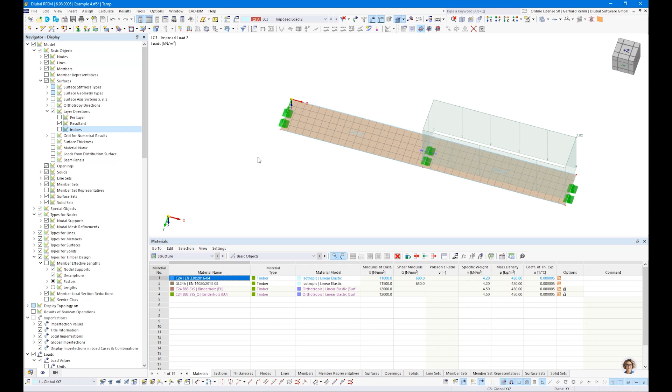Okay, so of course, consider the fact that the finer the FE mesh, the longer the calculation takes. For bigger structures, please think about what FE mesh size you use. You can refine locally as well. So it's not always about the global setting, but maybe simply refine only specific surfaces. Double click the surface, mesh refinement. You can activate it here and create a mesh refinement for specific surfaces, for specific lines, or for specific nodes.

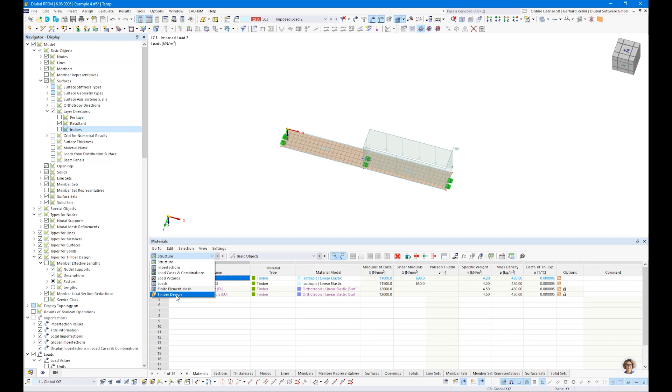Okay, so that's it so far. Let's run the analysis. Okay, so let's check top view. And you will see here there are some really small values we are not interested in. That's why I define a filter, enter 0.01. Please show everything which is higher than 0.01.

And what we see is we get shear in YZ plane, which is our rolling shear. We check our transversal shear in XZ plane. We check the bending, and we check the deformation for characteristic and for quasi-permanent. Additionally, we can check it again here with our

ratio envelope. So if you are interested in ratio envelope, keep the setting, and here you can define your own settings. So maybe only ULS or only SLS or only specific design check, only specific layer side, only specific layer material. Or you can deactivate the ratio envelope, and then you have only these checkboxes where you can check only one result. Okay, I'm not interested in this. I'm interested in the ratio envelope here.

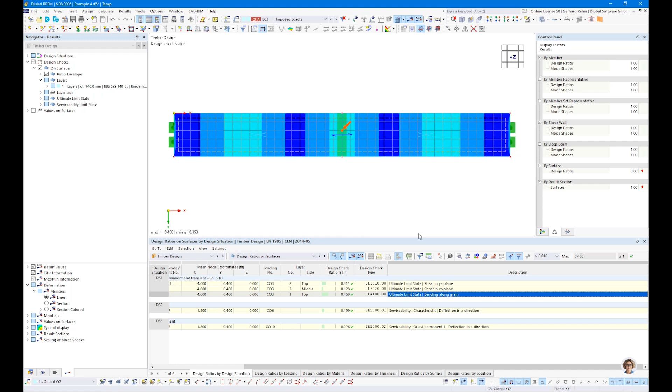Okay, let's check a design check. So double click the design check and you will see what's happening. Nothing special. We receive the stresses directly from the solver, so they are not calculated by some analytical equations. They come directly from our solver, and we compare our stresses from each layer side to the limit stress. Nothing special.

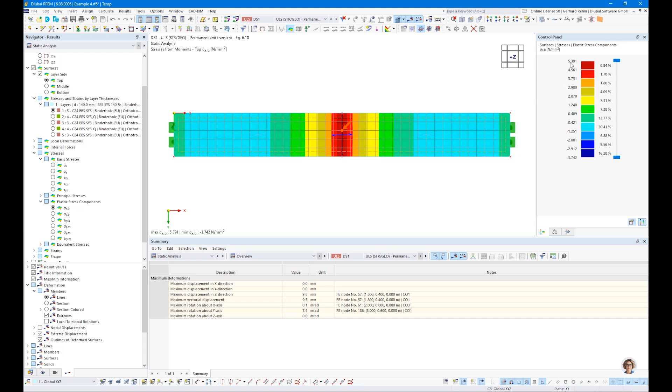To check the results, you can either check the stresses directly in RFEM by switching to the static analysis. Here you can, for example, say, okay, I want to consider layer side top, and let's check, for example, elastic stress component bending on top side, and you will see the stress component 5.4 Newton per square millimeter.

There's also this other option in the add-on. You can open this result dialog where you can simply switch to design ratio. Okay, the design ratio here is extremely small. Maybe worth to go to this location where you can see the design ratio over the layers, or maybe the stresses. Again, here you can see the stress on the transversal layers or on the longitudinal layers.

Since the transversal layers have no stiffness in X direction, of course, they cannot cover any stress for bending. Okay, for bending and also for shear. That's the typical shear stress distribution for CLT, and also tau YZ, it's our rolling shear stress. Okay, so this is how you can evaluate the results for CLT.

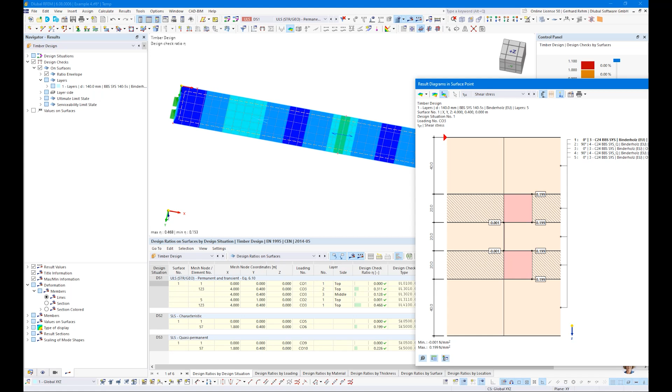Of course, there would be much more to say, but the time is running really quick, and the hour is already over. I will leave this for now. And of course, there are many more things to talk about.